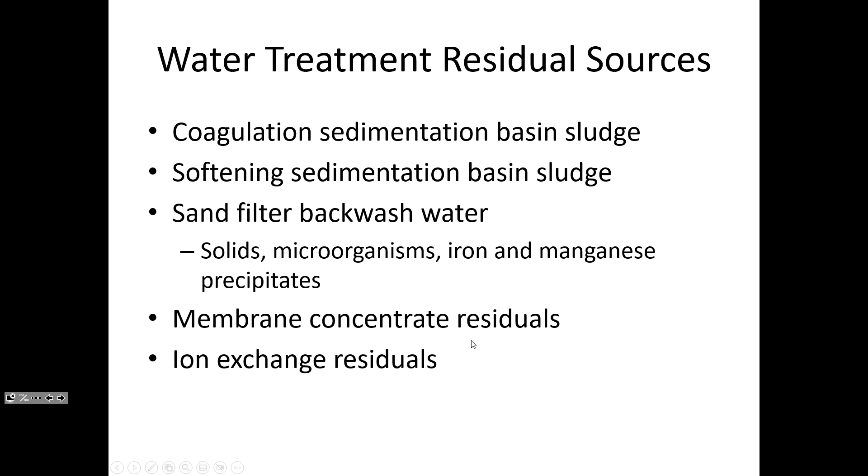Every once in a while we have to put more sodium back into the resin, so we flush it with a highly concentrated brine, and not all of those sodium ions go back into the resin. So you've got this backwash that's very salty and also has a lot of calcium and magnesium in it, and it's usually just sent to the sewer. Each one of these different steps is generating a waste.

Sludge is something we're concerned about both in water treatment and wastewater treatment. It's a mixture of solids and liquid, and we can break solids down into categories. There's fixed solids, meaning minerals like calcium carbonate, magnesium carbonate, alum, ferric chloride. The minerals are things that wouldn't burn away if we lit this sludge on fire. They're fixed, but volatile solids are organic materials that would potentially burn away.

So it could be microorganisms in a drinking water sludge. In the case of wastewater sludge, there's a lot of organic material because people put food waste and human waste into the system, and all of that can be burned away since it has a high carbon content. Our textbook goes through a series of equations to help do calculations related to the volume and mass of sludge.

And this is a huge concern. It's a really big part of the cost of drinking water and wastewater treatment—disposing of these residuals.

Think about how treatment plants are spending money. They're spending money on electricity because they have to move water from one place to the other, using electricity for things like blowers. In wastewater, you're aerating activated sludge, but even in drinking water we're using blowers for air stripping of carbon dioxide and air stripping of harmful volatile organic constituents. So electricity is a big part of the cost. Of course there's also labor and chemicals—we're paying for things like lime and other pH adjusters like sodium hydroxide.

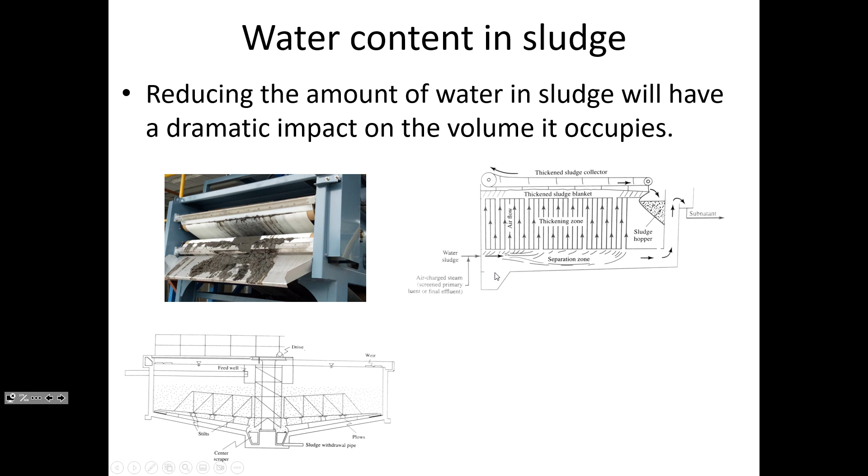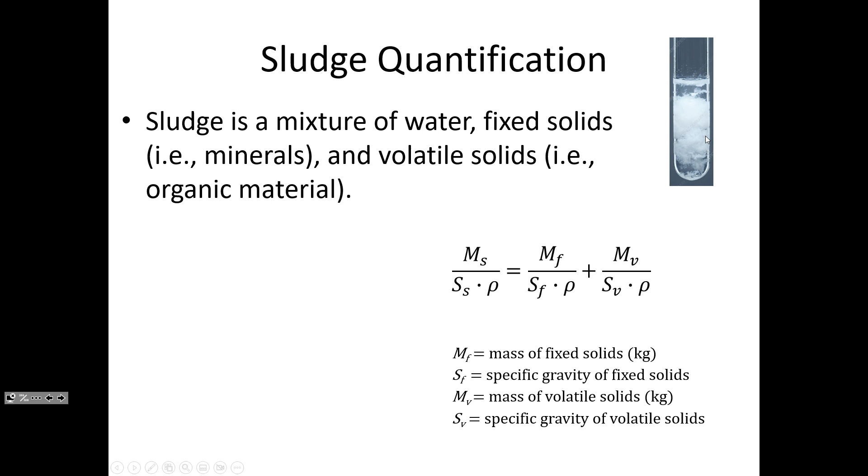There are also vacuum methods where you enhance the straining effect by sucking the water out of the sludge with a porous stone on one side and a vacuum on the other. If we look at the maximum range of these, you can get sludges as high as 60-70% solids, although most treatment plants balance the cost of disposal with the benefit of decreasing sludge volume. If you don't have to pay too much for sludge disposal, it may be good enough to take the sludge to 25% solids. But if you live someplace where environmental regulations are strict and landfill volume is expensive, it may pay to really invest in water reduction and sludge thickening.

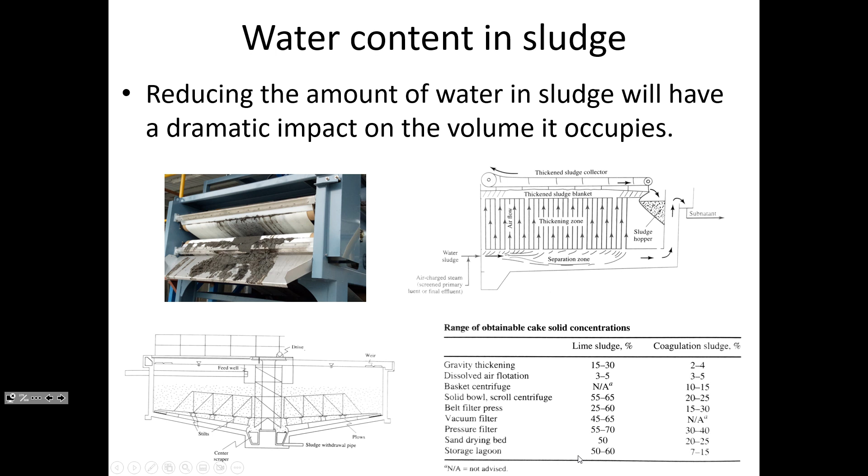Okay, so sludge volume is important for us to be able to estimate. There are some empirical relationships I'll show you in a minute that allow us to estimate the volume of sludge for alum or ferric chloride addition, or even for softening reactions where we're trying to figure out how much calcium and magnesium have been removed.

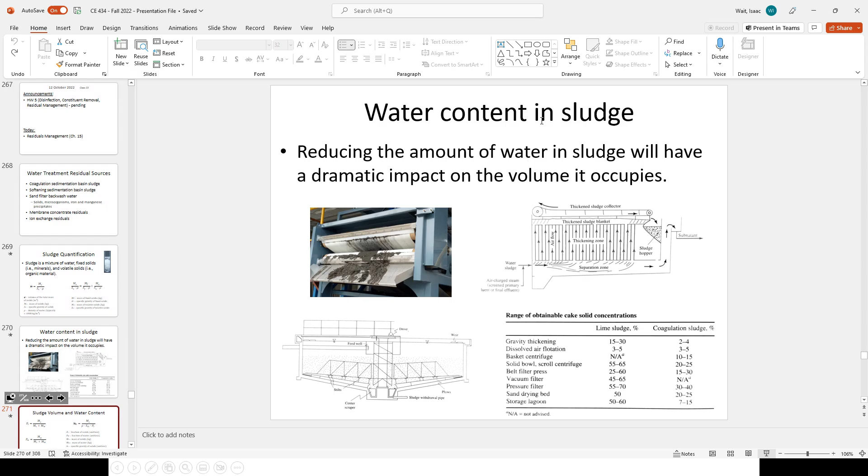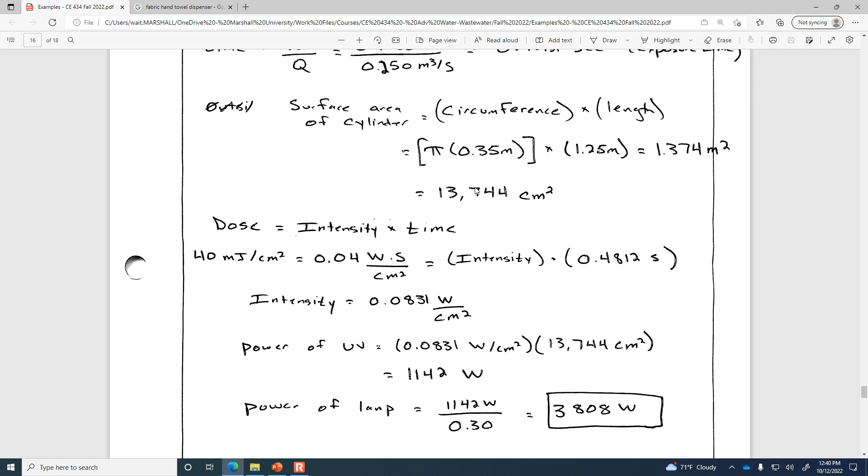Because I want to reserve some time for the other example, let me just jump ahead and show you the solution to this one. Even if you haven't finished it up yet, we can check to see if you were headed in the right direction.

So we need to identify the mass of solids and the mass of water. The fraction of solids is 0.03875. Now why do they use the P? I guess you could think of it as a percent - it's 3.875% solids, but it's expressed as a fraction. So they don't explicitly say it's a percent because it's expressed as a fraction.

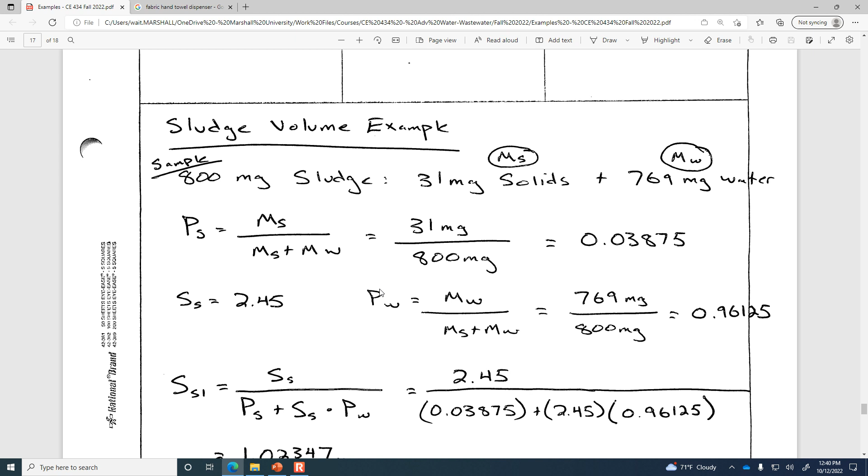The specific gravity of the solid is 2.45, and that, along with the fraction of water, is going to allow us to calculate the specific gravity of the sludge. Now it should be pretty close to 1 - if you get anything really far away from 1, you may have an error. The reason why is this sludge is 96% water, so it's going to have a specific gravity that's pretty close to water. The specific gravity of water is 1, because that would be the density of water divided by the density of water.

So here, the reason why it's 1.023 is because we're averaging the specific gravity of water and the solid particles, and it's only 3.8% solid particles and 96.1% water. That's why the specific gravity of the sludge is so close to 1 there.

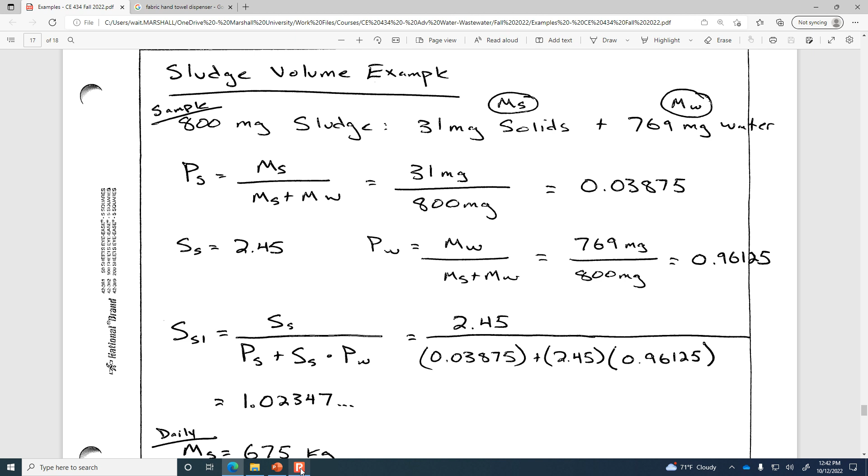Now, once we have that, we can estimate the daily volume of sludge that's going to be generated, because the mass is 675 kilograms. How much space is that going to occupy if we're generating 675 kilograms of sludge each day? Well, it's going to be the 675 kilograms divided by the unit weight of water, and the specific gravity of the sludge multiplied by the fraction that is solid particles. So it's going to occupy 17.02 cubic meters.

Okay, so that just gives you a feel for how the pieces fit together. Any questions on this first example?

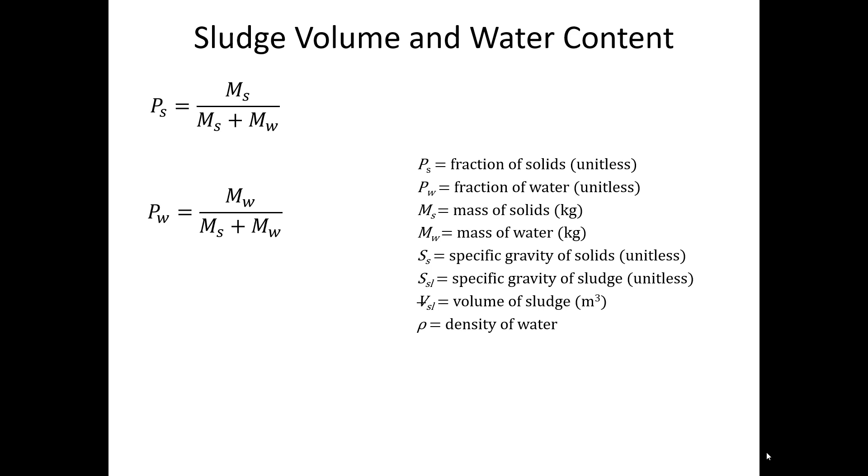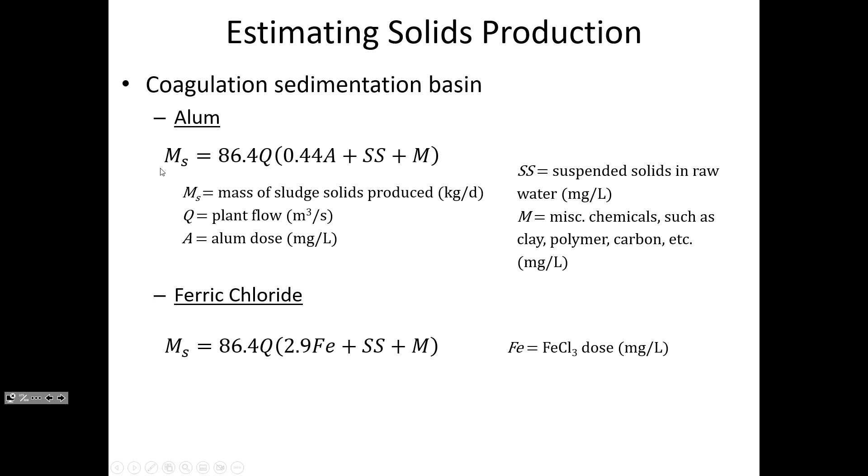There's a similar approach that's taken to estimate the effect of softening - so that was for coagulation. If you are doing lime soda softening, then the amount of carbonate hardness that's removed goes into the effect here.

This includes the calcium carbonate hardness, the amount of magnesium carbonate hardness, and non-carbonate hardness if you're doing soda addition to try and remove non-carbonate hardness.

So all of the contributors to the accumulation of sludge during a softening reaction are taken into account given relative weights, and then we multiply by the same 86.4 to convert milligrams to kilograms and seconds to days. This gives you the mass of solids being generated.

We've only got 3 minutes left, so I'm going to have to show you this example I had in mind. We had a sludge that we knew was 3.875% solids - that's the value from the last example.

And we've got a certain specific gravity for the sludge. What if this was at a water treatment plant that treats 10 million gallons of water per day, and they're doing softening - removing some carbon dioxide, some calcium carbonate and magnesium carbonate, but not removing any non-carbonate hardness. They're just doing lime addition to remove the carbonate hardness.

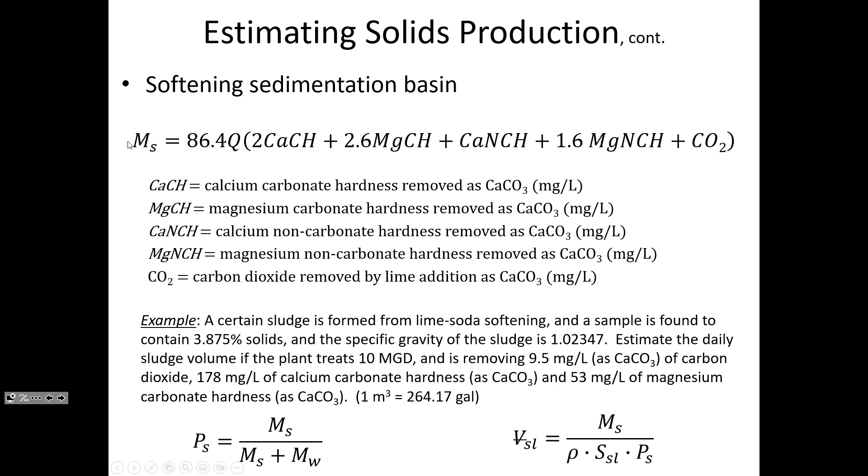So to figure out the volume of sludge, first we find the mass of sludge being generated, m sub s, and then substitute that into the volume of sludge equation. Let me show you what that looks like.

We already knew the percent solids is 3.875. We're given the concentration of hardness being removed for magnesium, calcium, and carbon dioxide, and we're converting 10 million gallons per day into cubic meters per second, since that's the format we need for Q.

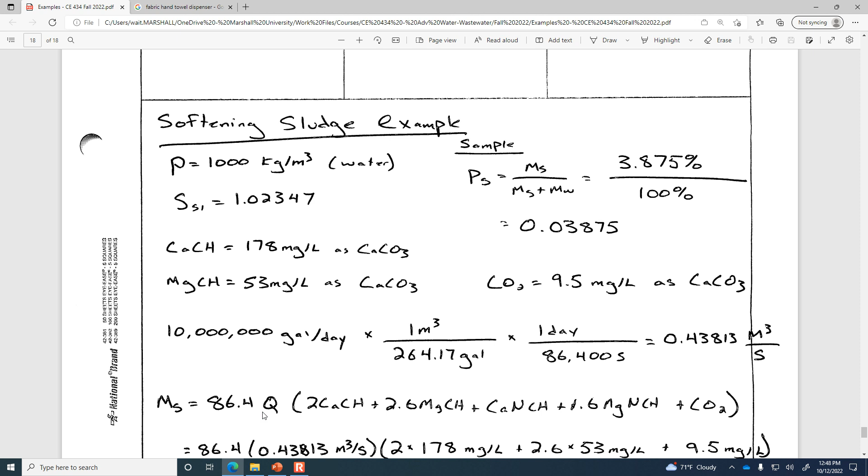So with that, we just substitute in all of the different amounts of hardness being removed, and we can estimate the mass of solids that are being removed each day.

This would be about 20,000 kilograms per day of solids, which is about 42,000 pounds - that's half a truckload.